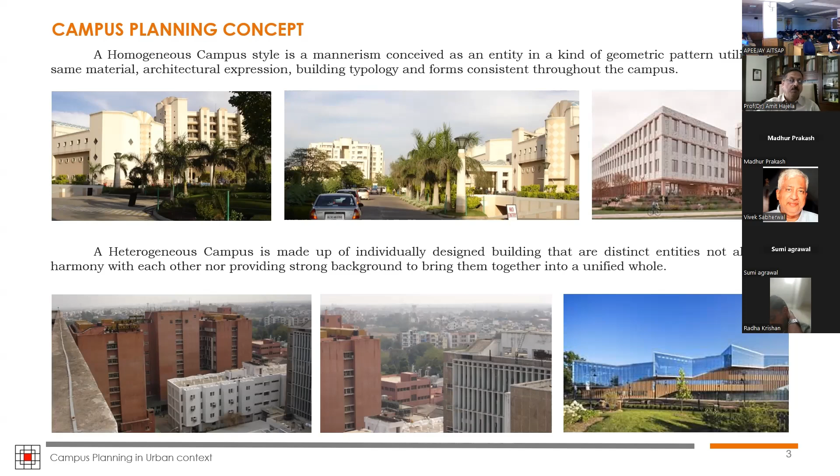They are not always in harmony with each other, but they still come together by virtue of various other aspects of design. So maybe in many cases, it's the landscape which becomes the stitching factor, or the public space design becomes the stitching factor, and they still become a comprehensive whole. So you get a set of buildings which have got their own unique identities, but then they still come together to provide their desired outcomes in terms of development.

Now, if you look at the critical models for development of campuses, we basically have the concentric pattern, the zonal pattern, the molecular pattern, which are fundamentally being used as the basic structuring principles for the campuses. Now, we have a theory which is called the core and periphery theory.

And that core and periphery theory is quite evident in the concentric pattern, where the academic buildings form the core of the campus, and they are then spread out through a series of rings where different levels of facilities are being dispersed, which primarily in a university or institution building has the academic areas. It has got the amenities areas. Amenities would mean all student-oriented activities.

It may also have a very dedicated research block, which could be made evident, and it is plugged into the main academic core. Then we have the residential facilities for residential campuses, but they are all being layered, and there are transitions which are being designed from the core to the periphery of the building. Now,

I'm going back to the principles of the Delhi Master Plan, which talks about the distribution of land in the university campus, which is fundamentally distributed into four broad categories. As per the Delhi Master Plan 2021, and which also has been suggested to be modified for this Master Plan 2041, where we are looking at higher FARs being provided to the academic building.

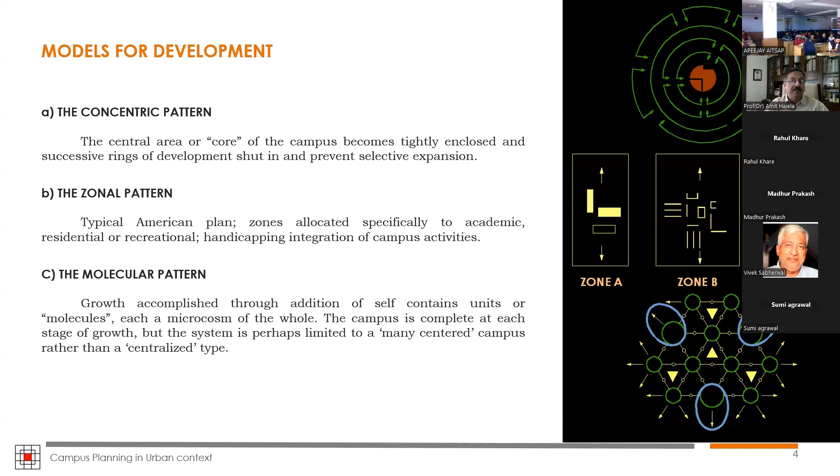The third category is the molecular pattern. In this case, the whole development is done in a molecular fashion. That means every small development is an entity in itself. However, when it keeps on expanding, they become an integrated campus as a whole, and every molecule at each stage is fully developed, so that it can perform and it's operational. And it also translates into distributed molecular components, which have to be integrated as a centralized campus by virtue of the public space design that could be undertaken for them.

Then the last pattern which is being utilized is a linear pattern. In the linear pattern of development, the buildings are set along a linear spine, and every component of the campus, which is again part of the same use-based pattern which we found earlier, gets integrated and continues to make a central space. Then the campus expands either linearly on the x-axis or the y-axis, and has its own set of expansion along the central spine, and also continues to expand vertically on either side of the central spine. So that also becomes very integral, and the campus continues to grow outwardly.

This also has an advantage where you can build the campus where the central core gets developed in the first phase, and the subsequent expansion can be taken horizontally on either side of the central spine, and it can grow incrementally. Now, something which is important for you to recognize is that campuses are never constructed in one shot.

It takes several decades to complete a campus in its entirety. And therefore, there is a component of incrementality which is associated with campuses, and they need to be characterized, structured, and developed in a fashion in terms of the spatial characteristics, the integration of technology, the laying out of the infrastructure, and the mobility plan for the campus. So all these have to be planned right from the inception, so that incrementality is embedded into the entire process of the development of the campus.

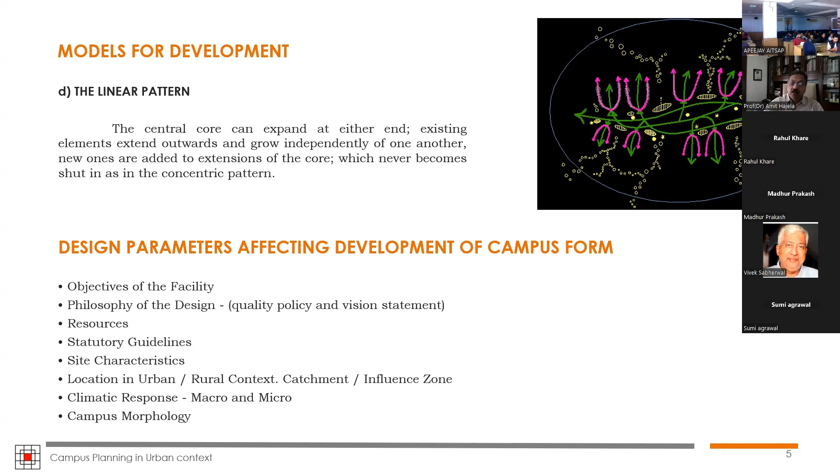Now, when we talk about the attributes of responsive campus design, it primarily gets distributed into 4-5 very critical areas. Use, which is the building typology; imageability that it offers in terms of visual aesthetics, activity structure, and it might have a very strong heritage connect, which would be very important. The efficiency in terms of circulation networks, the spatial efficiency, the accessibility, the flexibility, which allows us expansion.

And when we are doing any kind of add-on to the campus, it should be embedded in the principles of conservation and preservation, where you are trying to use the heritage buildings as very significant markers, which have great association with the city and the people and the community of the campus who connect themselves with those buildings.

And that's true for most universities, as I was talking about in Europe, in US, and in the South Asian countries, where they all have some very significant buildings. I don't know if you've seen, we have one of the oldest engineering colleges in India, which was the Thomason Engineering College, now IIT Roorkee. And it's characterized by the main building and the architecture of the main building and the space that actually qualifies that building as a very majestic building, designed in Doric style of architecture.

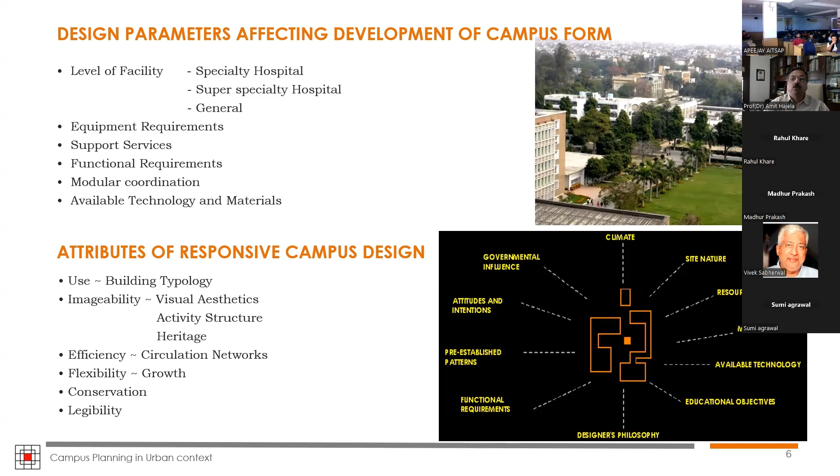And they are the most significant spaces within a campus where most associations get developed. And most associations are also contributing to interactions that happen along the campus, and they become an essential part of our large collective memory of the campus, which we live with. And therefore, we always say that student life is one of the finest eras within the lifespan of an individual, where you cherish the best part of your life in your university or your educational campus, and that stays with you for your lifetime.

And it is those spaces within the campus where you have spent your time, where you have interacted with your friends, the way that space was being utilized, and the quality of that space, the way it was being articulated, becomes so very important in establishing that collective memory that is so important.

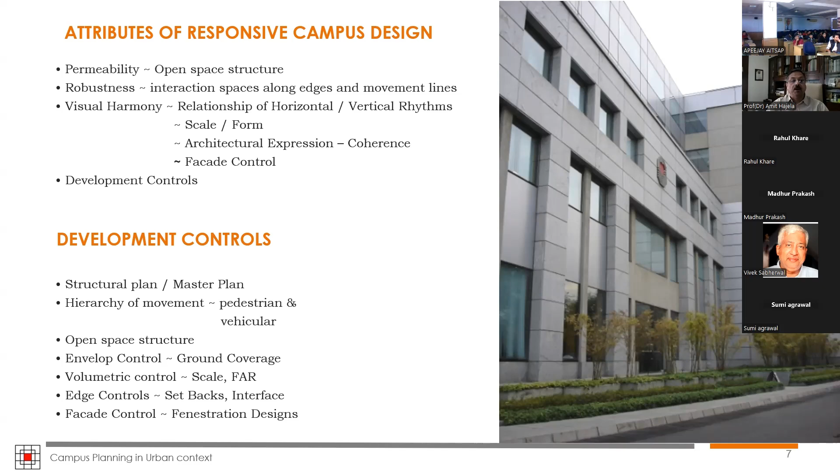And the last part is how the facade of the buildings are being controlled, which probably becomes a specific aspect of continuity or coherence, where the building elements are so articulated that they continue to find a reference or they become a vocabulary which controls the facade, and maybe it connects the building types, and it becomes like a homogeneous outcome of the buildings.

Now, the other aspect which is very significant for the development of the campus is the safety of buildings. Now, this could be in terms of the seismic safety, could be from all disaster risk reduction methods, DRRs, which are very, very important. And I think in today's times, when we talk about it, most of it should be governed by the natural processes which are there.

So nature-based solutions today are some of the best solutions that should be deployed, which are being developed as a consequence of the understanding of the site, reading of the program, reading of the context, establishing and mapping of what is around you, and developing a vocabulary which suits the development as a whole. And that's how the concept actually gets developed and derived. No concept can actually be derived in absence of this larger understanding of the contextual reference and the various aspects and dimensions that we just mentioned earlier.

So accessibility, as I said, is important. Safety in terms of fire safety, electrical safety, environmental management, they're all critical to providing safety to the user. And primarily, let me tell you, most campuses are very user-intensive buildings. And that's where the principles of critical thinking, lateral thinking, and design thinking all come together. And the idea is to be designing the campus for the user.

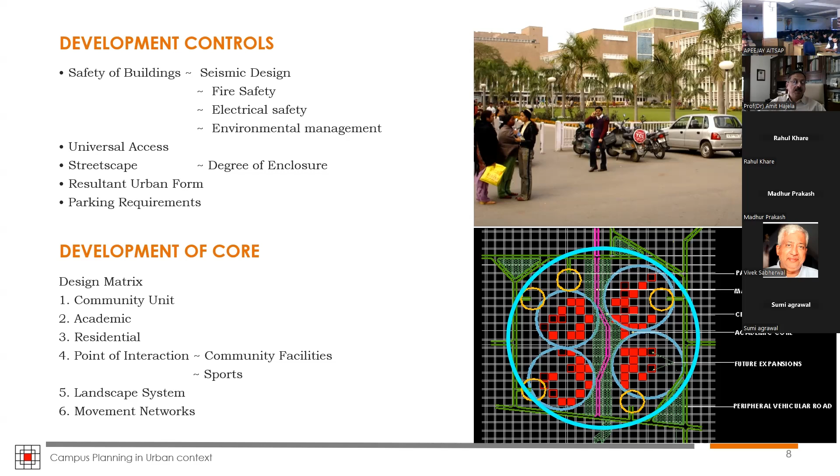So therefore, the critical design matrix translates into a community unit, in terms of both the student and the faculty, because that's what actually makes the academic community, the academic areas, residential areas, the interactive areas, which include community facilities, sports facilities, recreational facilities, the system of landscape, the movement networks, the network of the infrastructure, and so on and so forth. Now, the guiding principles for both greenfield and brownfield projects could be summarized as a whole in these very critical 21 significant aspects of campus design.

So a campus has to have a vision and mission. Campus has to be sensitive to site and environment. The campus needs to respect the natural landscape and the biodiversity. The campus should have a response to the context and historicity of the area where it is being developed. The campus should have a very strong interface with its adjoining neighborhood or with the adjoining areas.

The linkages of the campuses are important by virtue of its connectivity, both internal and external, and also to the public transport system that we're talking. The zoning of functions within the campus, again, is very critical, and that translates into structuring and the structure plan. The campus mobility within itself. That means while we are connecting it to the external mobility, or urban mobility, we are also connecting it to the internal mobility by virtue of very clearly defining the vehicular and non-vehicular areas.

The campuses need to be designed for inclusion. Inclusivity is the way forward in the 21st century. And I think all buildings, campuses, cities that we design have to be inclusive in very nature. And it should meet the kind of diverse cultural and social responses that we have in the context where they are built. And it is an equity that is being established and it is being manifested through the design of the built environment.

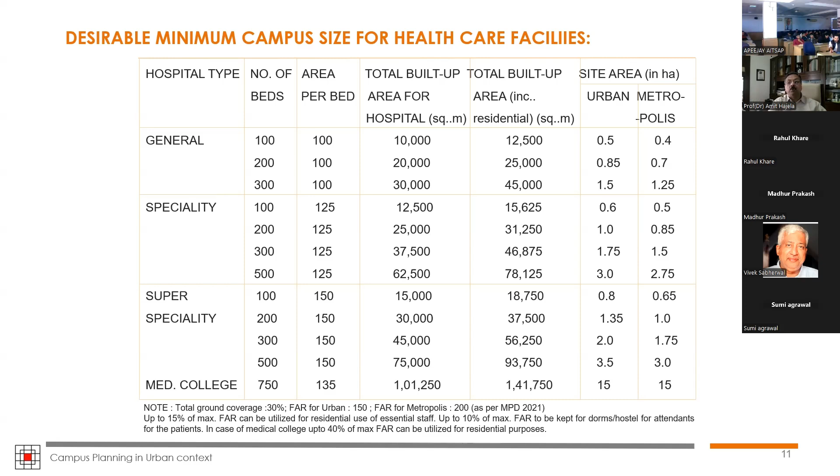So we wrapped the new hospital building around the main building, and it became a very important aspect of its integration, and was then interspersed by various functions in terms of housing, some training centers, nurses' hostels, staff hostels for the staff, because it was not an educational institution, it was a hospital. So we basically had a hostel for nurses and residential areas for the doctors, distributed through a series of green spaces, which could be used by different users at different points in time.

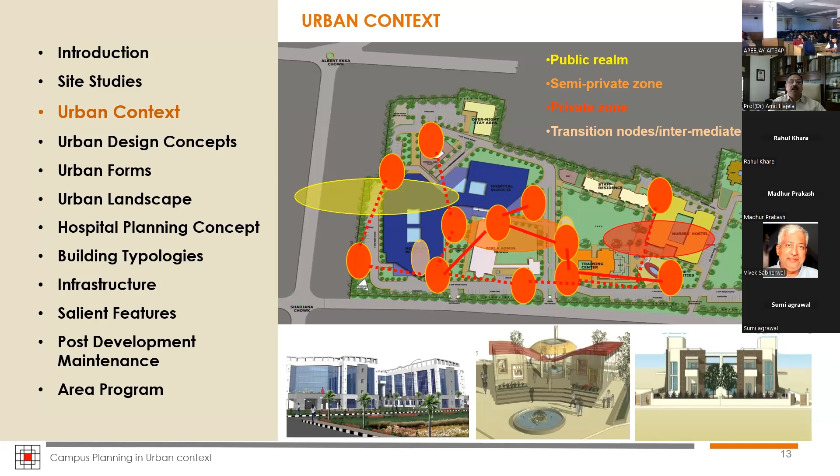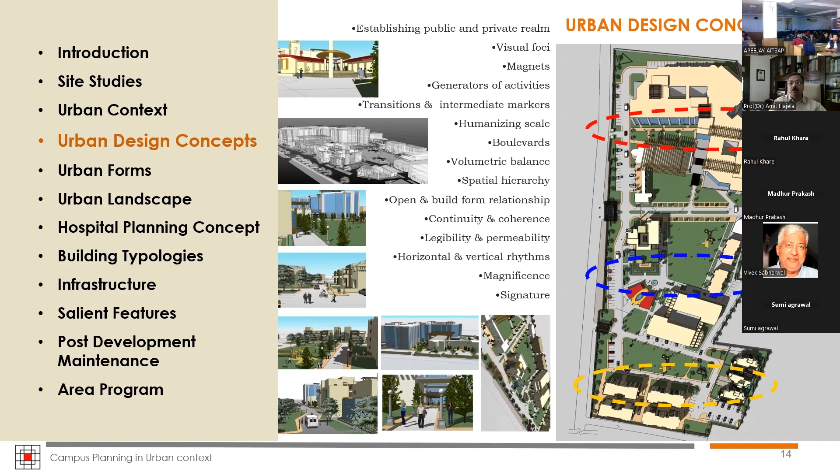The spatial hierarchy was again articulated with respect to use, open and built form relationship, continuity and coherence, legibility and permeability, horizontal and vertical rhythms, the magnificence of the entire building and structure, and finally making it a signature building in the entire urban context. So we had this series of hierarchy of movements, and that's how it was articulated as we went along. So the different kinds of urban forms got created.

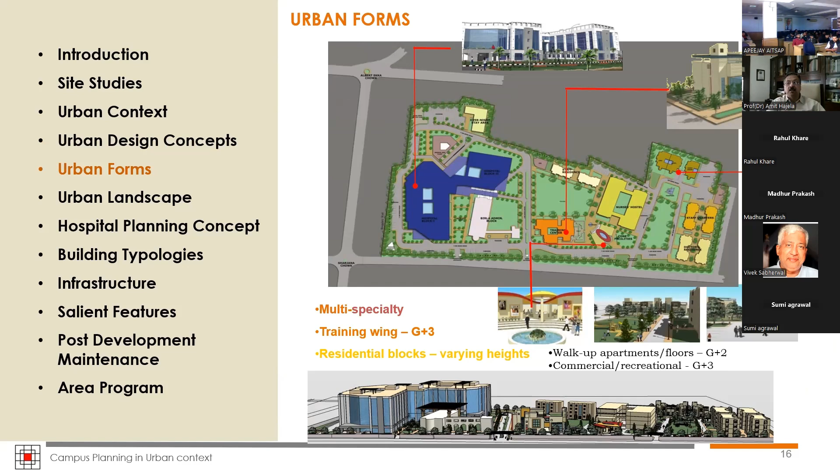You see the site section and how the volumetric control was developed. The very function demanded a high-rise building at one end, and then slowly it was managed down to the scale of the residential buildings. It had a series of unit-level open spaces, cluster green spaces, large urban green spaces, and public green spaces as part of the open space hierarchy.

Now, by and large, we look at hospital planning as a concept. I'll just briefly touch upon the hospital planning concepts, which are actually developed as a collective effort of the architects as part of the design team, doctors, the hospital administrators, the paramedical staff, the service providers, the engineering teams.

So they're all important in the way hospital planning is being undertaken. So ideally, one needs to take a very important integrated approach to the design of hospitals. Infection control is the biggest problem that we face in these hospitals these days, which is as a consequence of the hospital-acquired infections, and it's a global problem that is being addressed.

And from that point of view, patient safety therefore becomes very important, both from the active side and the latent side. Environmental control, sick building syndrome, which is important, and control of bacteria and bacterial infections being expanded. Reduction of the indoor air pollutants, the aesthetics and the interior environment, socio-cultural aspects where the building or hospital is being built, biomedical waste management, and then something which is a fundamental where we talk about diagnosis before treatment.

That means you will treat a patient once you have actually diagnosed the real problem. So you have to have a very strong diagnostic facility which is available, and from there that decides the progression of the treatment. Emergency and trauma are again a very important aspect, because most patients do roll into emergency conditions, or maybe it could be a trauma-based condition for various reasons, such as a medical emergency or an accidental emergency, and they need to be provided with medical aid and facility.

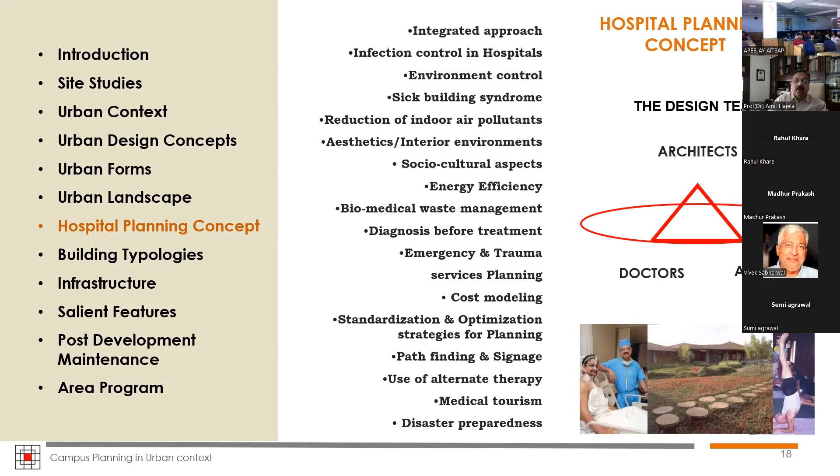So primarily, there are 5 important areas in a hospital, which include the outpatient department, which is the OPD, the inpatient department, which is IPD, emergency and trauma services, the diagnostic areas, and the services, hospital services at large.

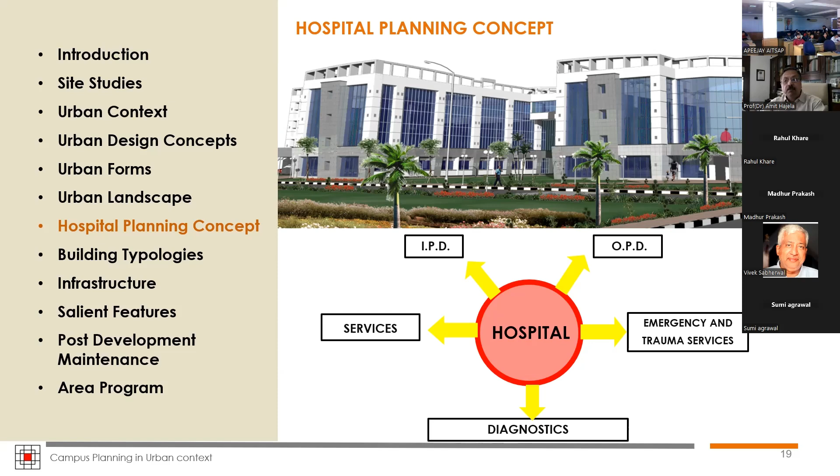Now, the important aspect of the operational and functional planning of the hospital includes its use and efficiency. The equipment planning is the most important, and systems design, because it's the equipment that decides the spatial planning. That's why I said the level of facility will be the determinant of the level of equipment that is going to be housed, and therefore it has to be designed for that purpose. Then we have the patient psychology and the healing environment which needs to be provided.

We also need to respect the privacy of the patient, the interior environment, and the circulation, both at the building level and at the external level, and the kind of flexibility of expansion that the hospital provides. So I think it becomes a very important aspect, and hospitals these days are very important imageable components in the larger urban landscape. And therefore, we need to be very cognizant of the fact that the imageability of the hospital, being a very important segment in the entire urban landscape, needs to be looked into.

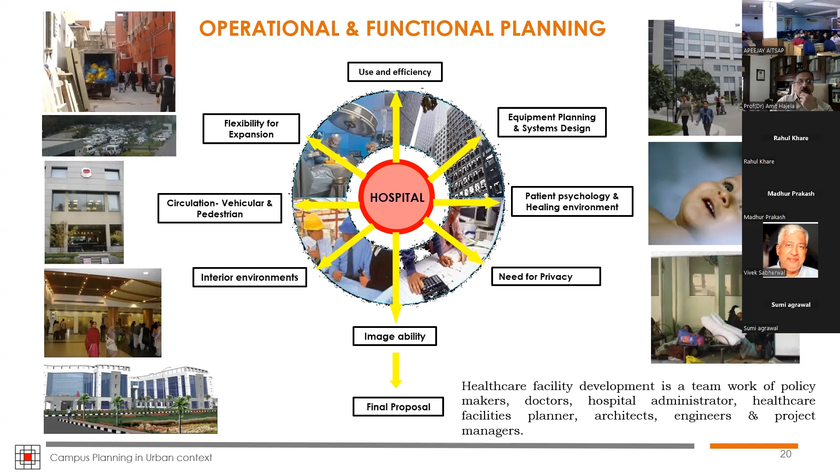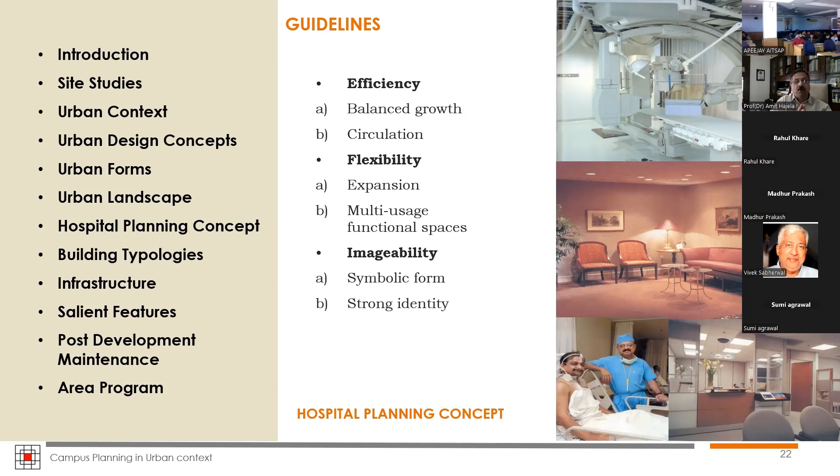And all these dimensions, when put together, should lead to the final proposal of the hospital. So a critical design matrix needs to be developed, which should be an integration of all the above that I have talked about. And the critical guidelines should be broadly distributed into 3 areas of efficiency, flexibility, and imageability. Efficiency should include balanced growth and circulation. Flexibility should include expansion and multi-use functional spaces. Imageability should be translated into symbolic form and a strong identity in a healthcare facility.

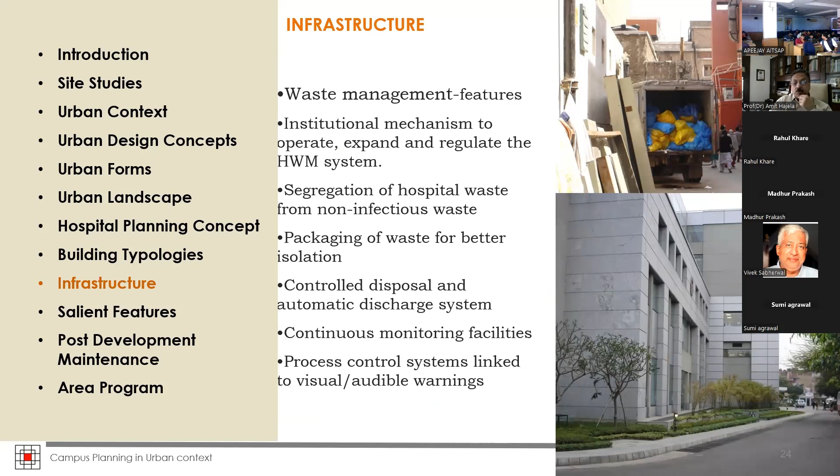Now, the infrastructure issues should include the aspects of waste management, the institutional mechanism for the entire hospital waste management, segregation of waste, isolation, disposal, monitoring of facility, process control, and systems linked to both visual and audible warning for differently abled patients, accessibility and so on, sewage treatment, water supply, electrical systems, internet connectivity, satellite communications.

Now, we are also talking about things which are connected to telemedicine. So therefore, it becomes important. Communication networks, power backups, core facilities, centralized pipeline system, and rainwater harvesting systems.

Apart from that, we need to be looking at a sustainable campus from the perspective of alternative energy sources, energy efficient design, thermal comfort conditions, noise and air pollution control, water management, waste management, soil stabilization, sustainable sites, reuse of recyclable materials, and disaster risk reduction that I have been talking about. And this applies to practically all types of campuses that you are dealing with.

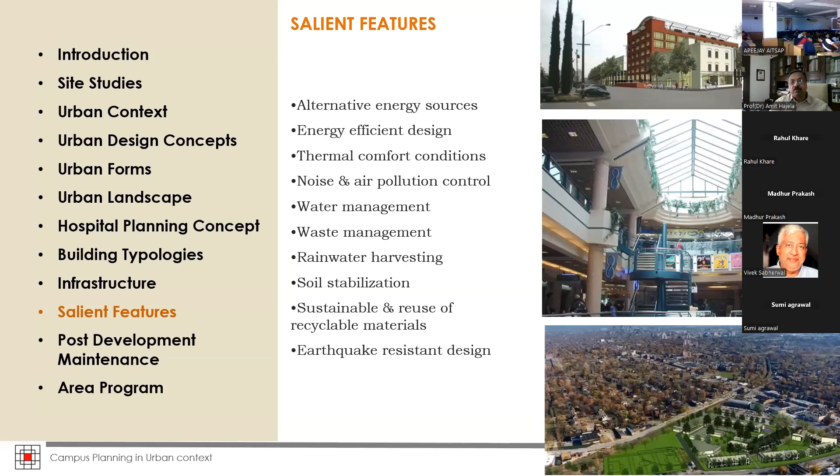So I think we need to be talking of all the energy efficiency measures, water conservation measures, measures which enhance the use of alternative energy sources, and they can very well be manifested through the design of the built environment.

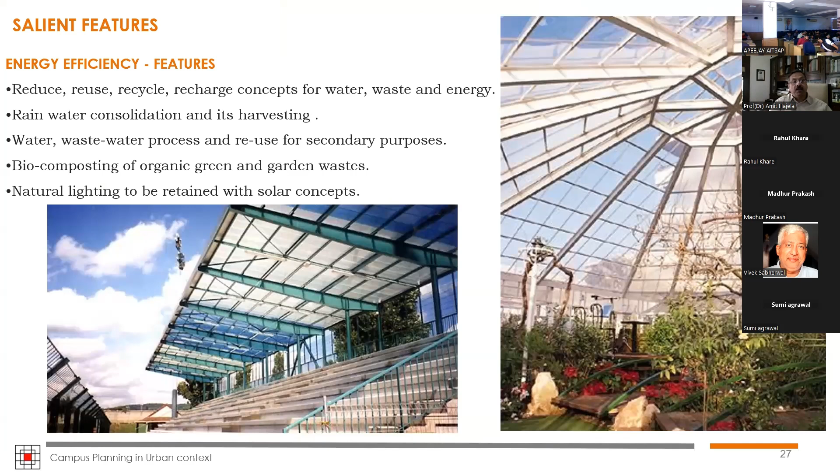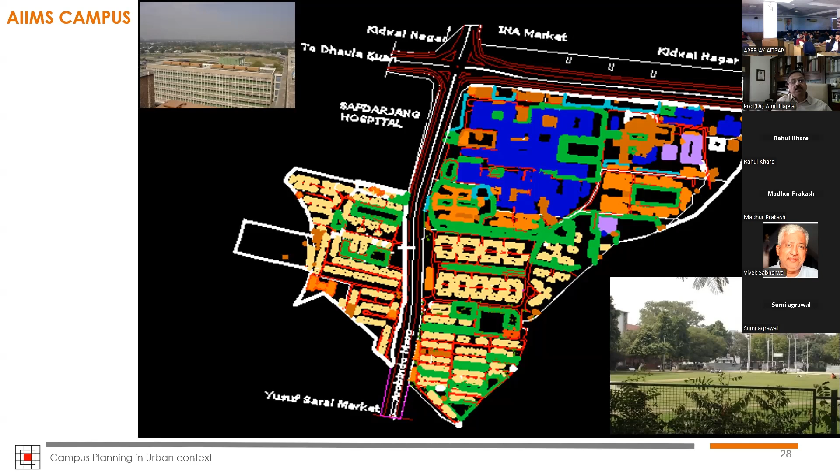Now, this is an example of the AIIMS campus and the way it is congested, and now it's going into redevelopment. So the blue area that you see, primarily the upper part of the campus, are the main hospital buildings, and on the rear part of the campus are the residential areas. They have expanded the residential areas across the road, behind the Safdarjung Hospital, and that residential area includes the staff housing primarily on that side.

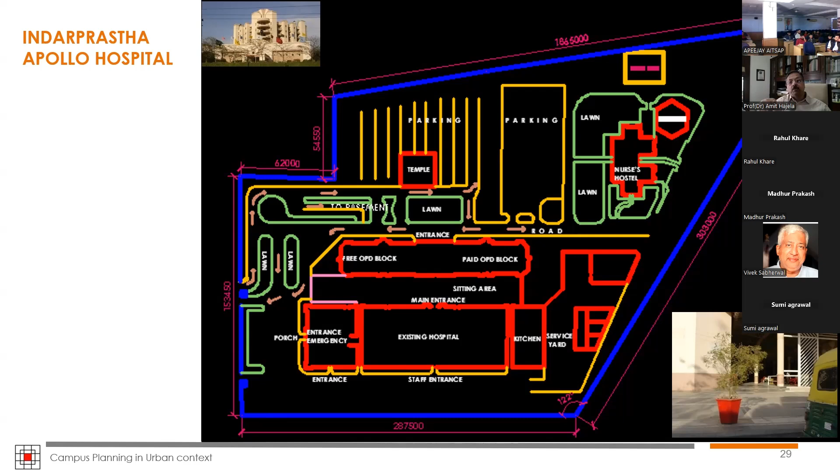Then we see the example of a homogeneous campus, which is purely a hospital facility, the Indraprastha Apollo Hospital. It has basically two prime blocks, the OPD block and the IPD block. And we have the emergency with the OPD block on one side, and on the other side the IPD block supported by hospital services and a nurses hostel alongside the main campus.

Now, this is another interesting example, the Escorts Heart Institute and Research Centre, which is now Fortis. They expanded their hospital and got a very special approval from the local authority, where they had buildings across the road and they were allowed to create an underpass between the two buildings. So they integrated the old building, which is the IPD. They did an expansion, what you see in the images.

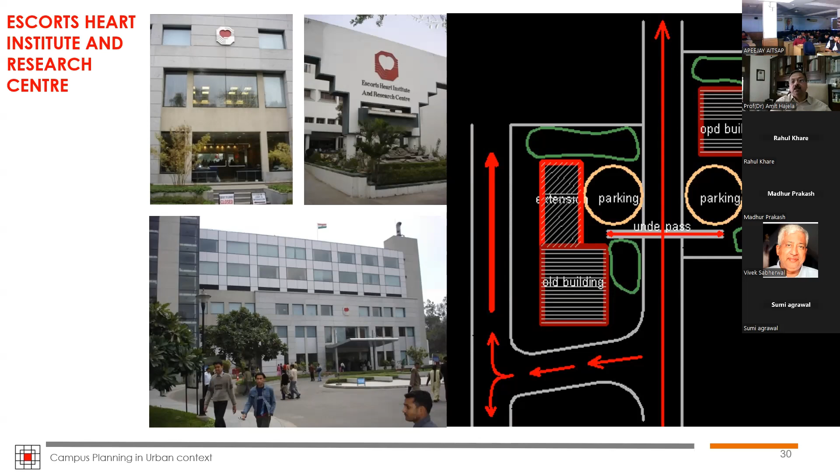So the top left is the old building and the top and the bottom ones are the expansion of the IPD areas. And then they connected the OPD on the other side along with some residential facilities. An underpass was provided to connect the two building blocks, and the hospital becomes one single entity. It's a very private use underpass which has been provided.

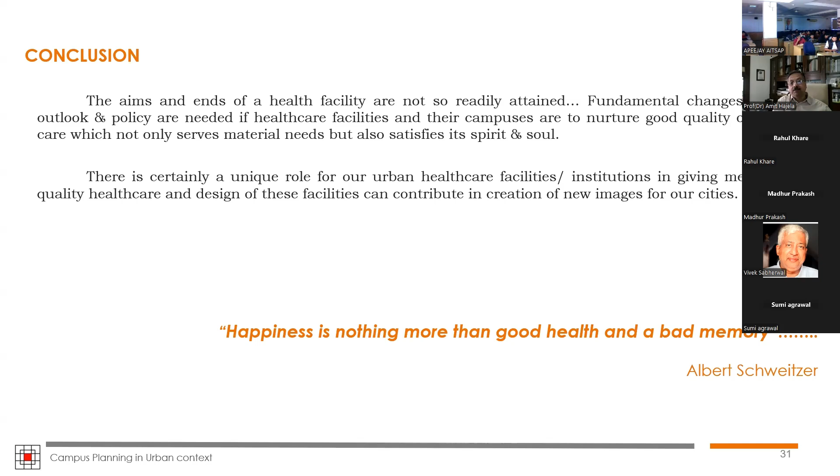So primarily, if we conclude, I think it's very important that we create happiness for the user. Going to the hospital is never a very healthy requirement, but in case we can't avoid it, it should only translate into giving you good health and should just remain with you as a bad memory for a time which passed away.

Now I'm coming to an educational campus which we worked on, and it was part of a very strong urban campus. We designed this campus, which also included a medical college in the city, and this is the Allahabad University campus, where we were commissioned in 2006 and we worked on this campus for almost about 12 years. This total campus has grown over three different periods, starting from 1887, which is the first campus that you see, the Muir College campus.

And it is a truly urban campus. There are a total of 10 campuses interspersed in the city. And this that you see is also along two major highways. One is the GT Road, which comes from Delhi and Kanpur and goes right to Varanasi and further up to Calcutta. And the other one is the Lucknow Highway, on the other side. So the campus is actually abutting two major highways.

The total land area being developed in these three campuses was about 356 acres. And we added another 72 acres of medical college, again in the city. So what you see here are buildings: the blue ones are the existing buildings, the ones in pink are being added. Again, you see light yellow buildings, which are the existing hostels, and then the dark yellow ones, which are the newer hostel buildings and facilities.

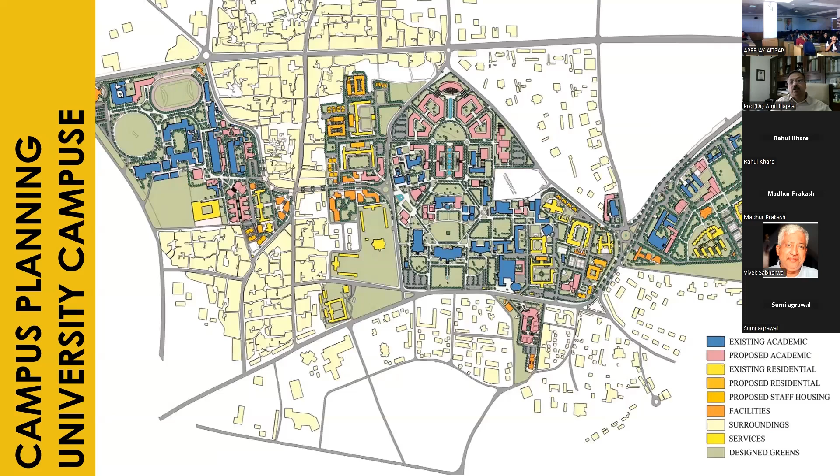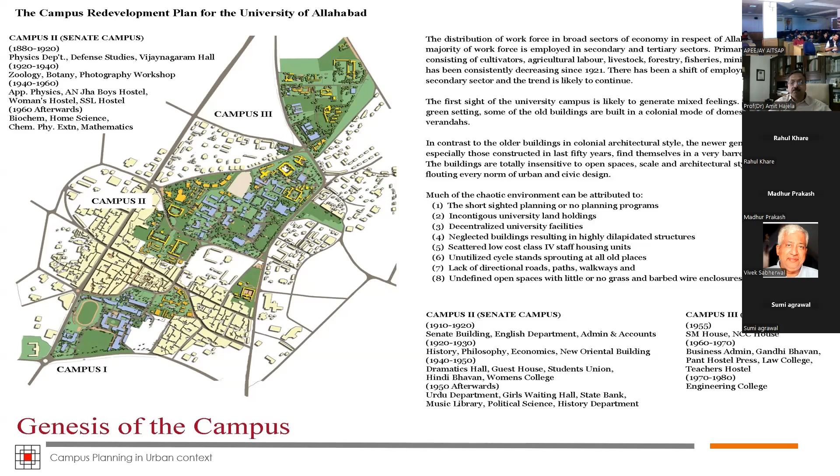Now, these are the different phases as I was talking. So there were first, second, and the third major campuses, and there were allied areas which are owned by various organizations which provide residential facilities on a community basis. So they are privately owned, but they are also an integral part of the larger campus system.

We went through a very elaborate process for redevelopment, which had a very well-defined process, which included the audit and then subsequently the outcomes of the audit, both in the quantitative and the qualitative way, translated into identification of critical factors, the typologies, as I have already talked about. All those components were an integral part of the process, leading to the key outcomes which translated into the derivatives for the intervention into the campus.

We had significant heritage buildings, so heritage buildings had to be integrated as part of the larger system of design and also used as a visual foci in the structuring of the campus as a whole. And then a campus of this stature, also being a publicly funded university, we had to plan it for a 15-year period. Now, let me tell you something.

Normally, campus plans are done in three categories. There's a short-term master plan for a campus, which is for about 5 years. The mid-range master plan is done for 10 years, and a long-range master plan is done for 15 years. So the two campuses that I will show you that we designed and redeveloped were all done as a long-range master plan, and the period was qualified to be 15 years in both the cases.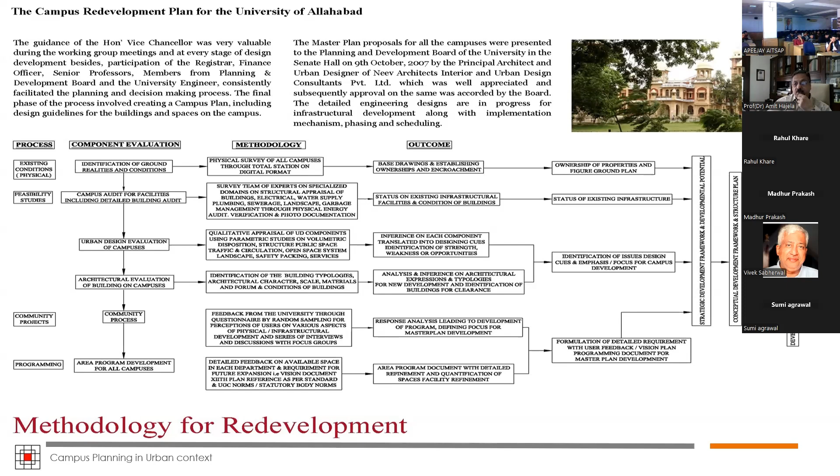Now, this was the basic understanding of the distribution of land parcels, the connectivities, the condition of structures that existed, what are the buildings which were very poor and could be removed and could pave way for new additions to the campus, how the integration between the three could be established by reinforcing the street between the three campuses, and how significant nodes could be modified and developed to become a very significant part of the larger redevelopment of the campus, which would add value not only to the campus, but also to the city at large and to the student community, which comes from all around the region of Allahabad.

And let me tell you, Allahabad University was also known as the Oxford of the East. It was established in 1887; the university established prior to this, in 1882, was the university at Lahore. But then in the north of India, Allahabad became the most significant university after the three universities that were established in 1857, which included the University of Calcutta, University of Madras, and University of Bombay. So in the north, Allahabad University was the most significant university, and it was controlling all other affiliated colleges in the north of India and in the central province, in central India, once it was established in the year 1887.

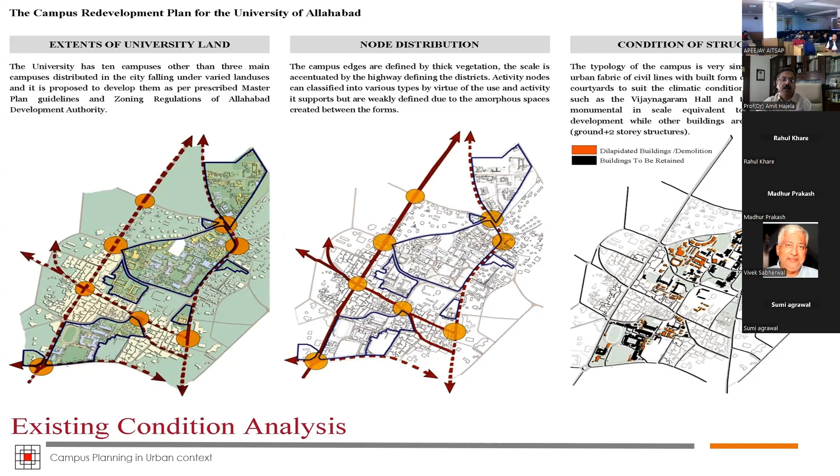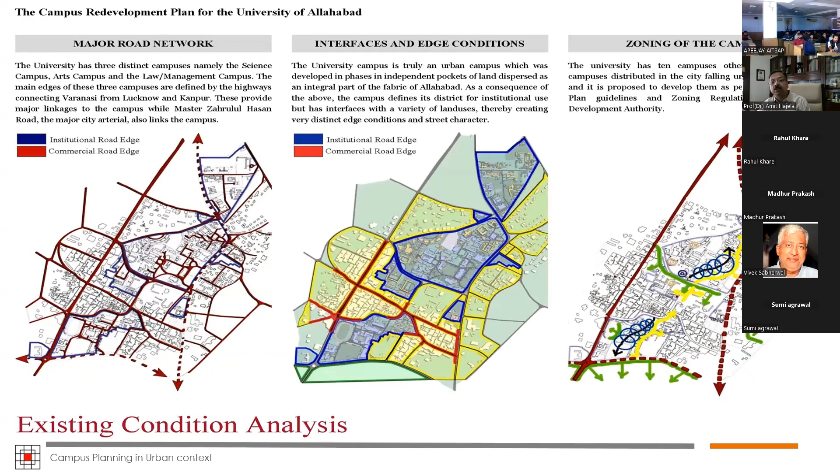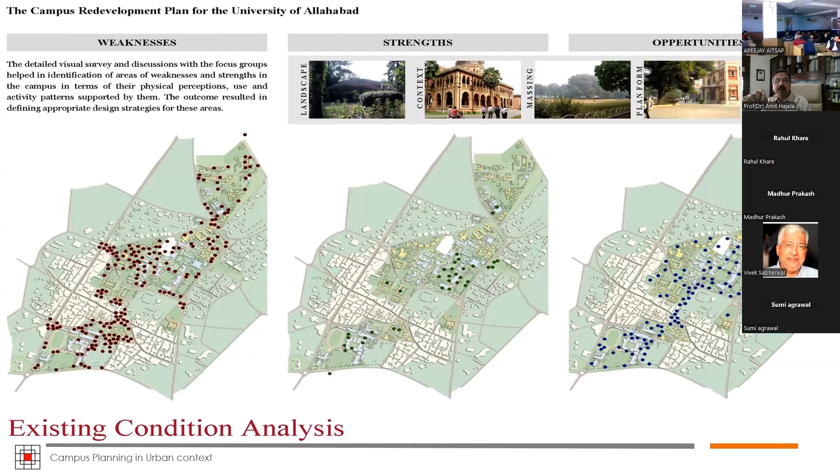So we looked into multiple dimensions and we did the analysis of the existing structure and the way the campus properties existed, what could be the method of articulation, the resources that were available, and the mechanism by which the three campuses could be stitched. So we did a detailed SWOT analysis for the existing campuses at the micro level by doing a very detailed audit of each campus and identified the strengths, weaknesses, and opportunities which we could actually exploit at both macro and micro level for our intervention.

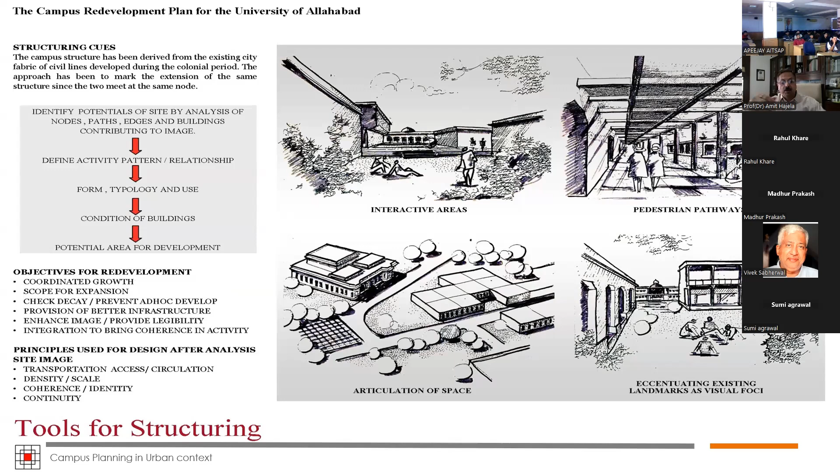So this was the existing figure ground plan, the land use plan, and the volumetric plan of the campus. And then it translated into a series of ideas as to how the integration of campus areas could be undertaken, what tools could be deployed, and we defined the objectives of development and how it could be done. And this is not a homogeneous campus, so different buildings were done in different styles. They also had varied typologies. So we used the heritage buildings as a very significant marker in the entire campus and tried to stitch and develop the entire campus in and around that.

So these were the structuring tools that we used, which we had the movement, associations, clustering of the components of the building types, identity, the patterns of growth, the critical design factors, how to bring about coherence and order, and the typology, imageability, and the legibility of the campus.

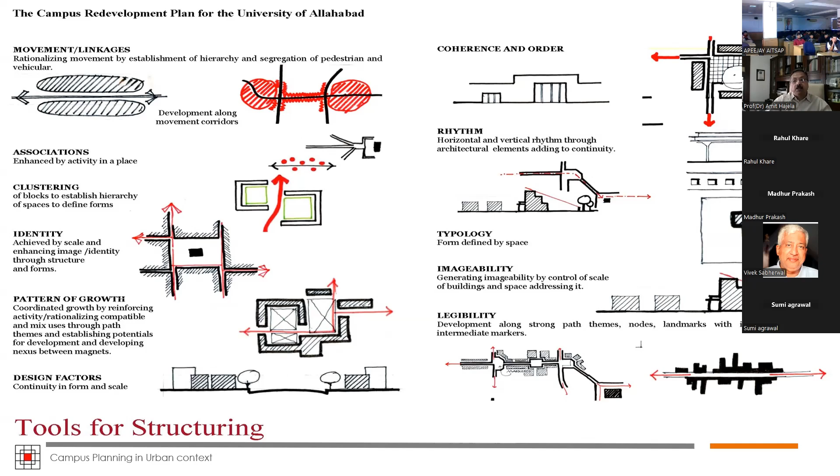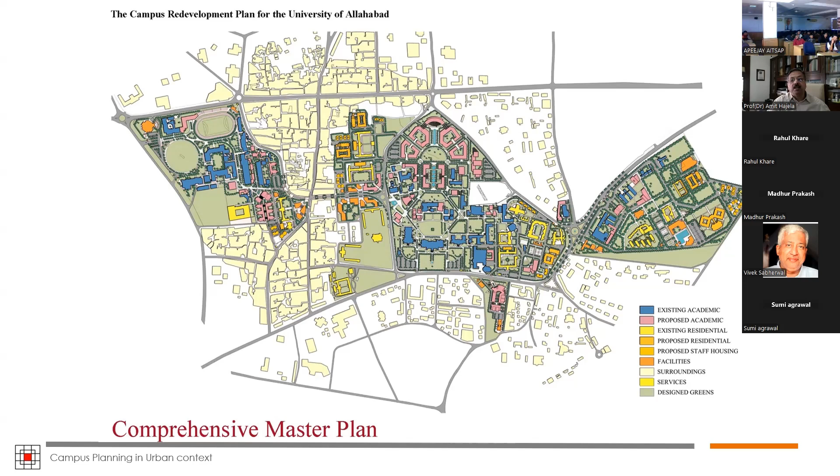And this was the final comprehensive master plan where you see re-articulated systems. The campus was actually pedestrianized by using the external roads of the city as the critical access points, terminating into parking lots and thereafter becoming all pedestrian in the central core of the campus. So this all was being done over a period of 12 years and it was being done incrementally. And several buildings have now come up on the campus, which have been done in part.

So the stakeholder utilization was critical. Demand from the stakeholders was well structured and articulated. And also the funding and the grant mechanism from the Government of India became very critical to this. This led to a series of creation of public spaces, and there were 4 or 5 critical areas which became the great public spaces of the campus.

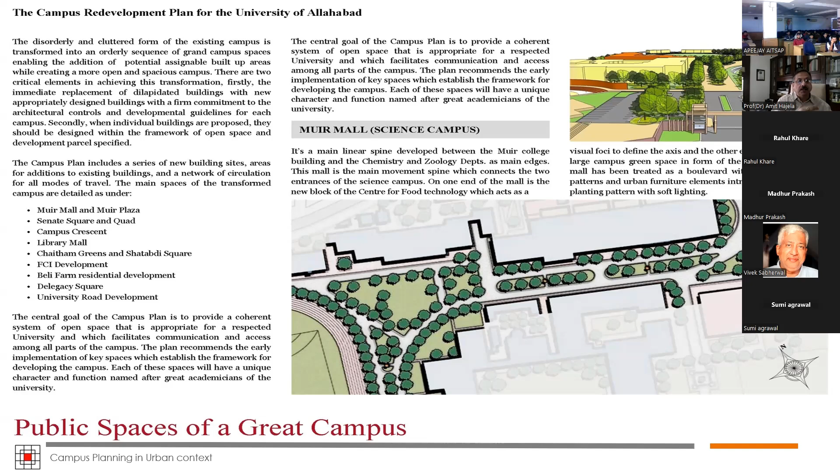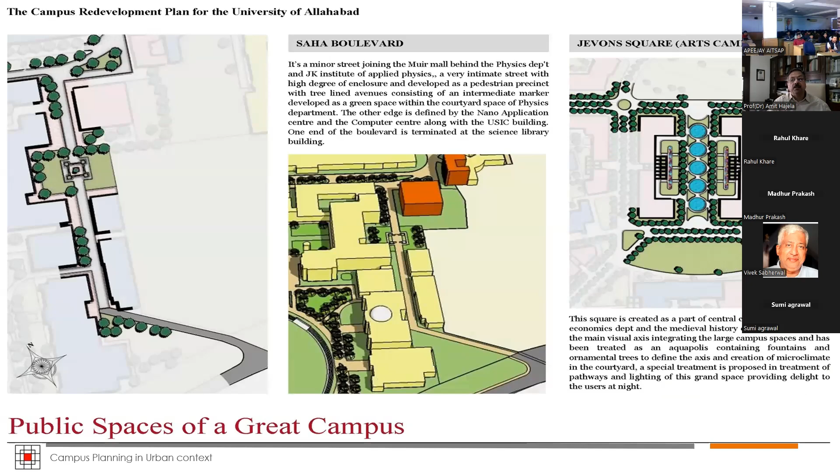And so there were the critical public spaces in terms of the critical malls, the quads, the crescents, the larger squares, and the residential development, and the development of the external areas as interfaces of the campus. So you see all these part areas were picked up and detailed out to become large public spaces in and around the building typologies, and how the structuring was being done to create an experience for the user, where we tried to keep the old heritage buildings as the main axis, and the movement was being articulated alongside that kind of development.

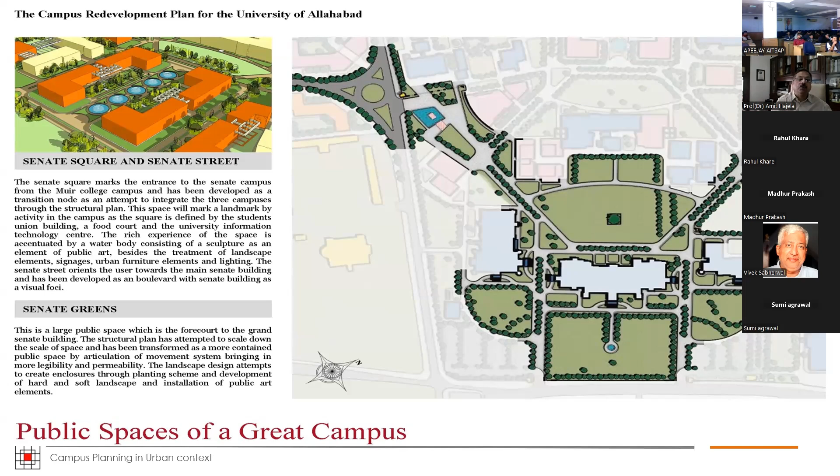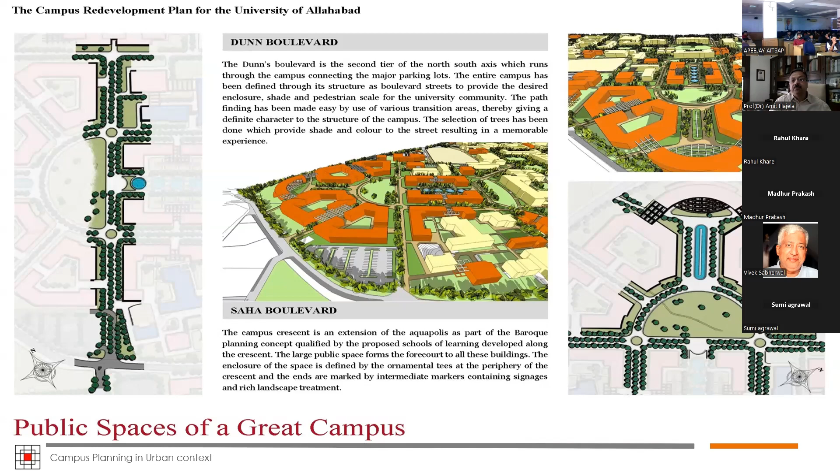So you see all the buildings which are in the orange color are the new additions by the newly articulated systems of movement integrated to parking lots, and therefore becoming a pedestrianized campus. And all these malls that I was talking about, the crescent, the malls, they were all being created by virtue of the articulation of the campus.

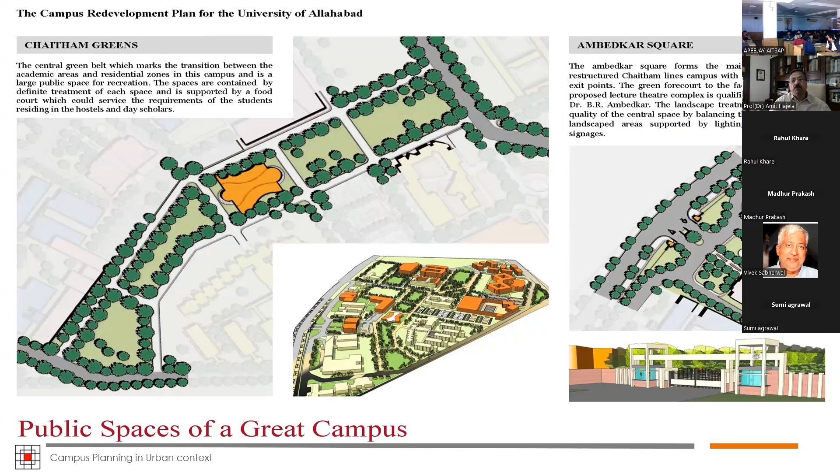Now, these are different ways by which those important experiences were being embedded into the movement system in 3 different campuses. And the large public spaces of the campuses were being derived, with the entrances being qualified, the landscape being handled, and so on and so forth, apart from integrating the recreational areas and reinforcing the sports facilities of the campus at large. So that was the Muir College campus, the first campus.

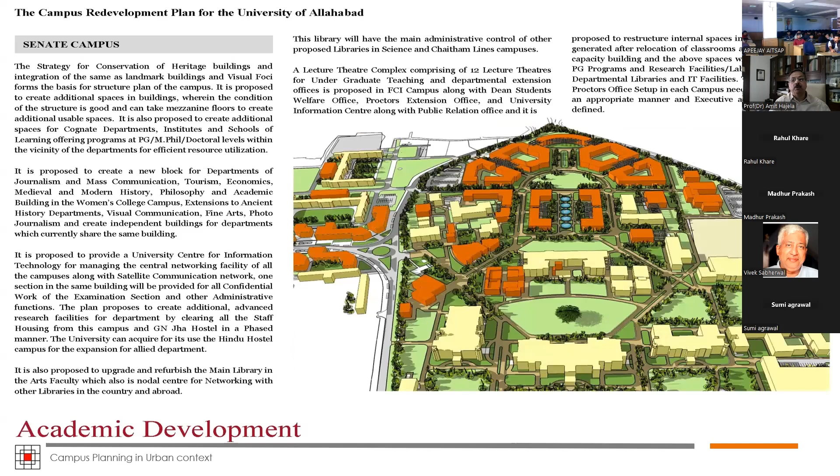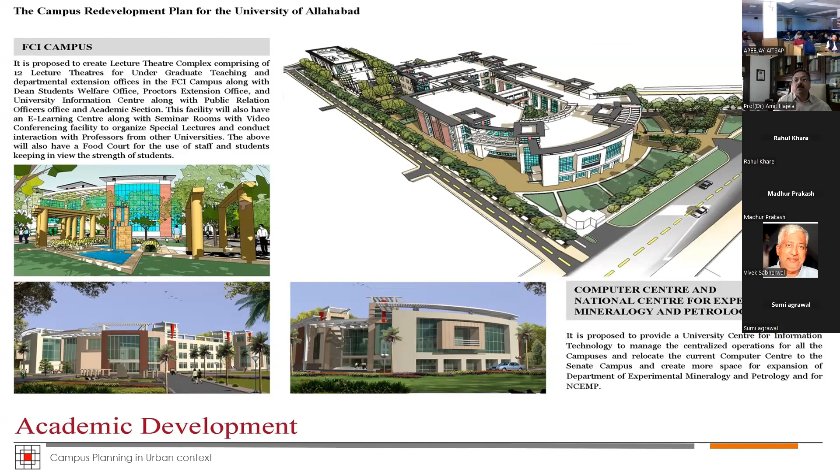This is the second campus, that was the 1920. This is the third campus, which was 1964. And these were the adjunct properties which were being designed as central lecture theatre facilities and the administrative complex for the university. And these buildings have been designed, executed, and they are functional as of now. So if you see in totality, it gives you in a nutshell how 3 campuses came together and how structuring open space systems, movement systems, articulation of typology, and all those things were being integrated.

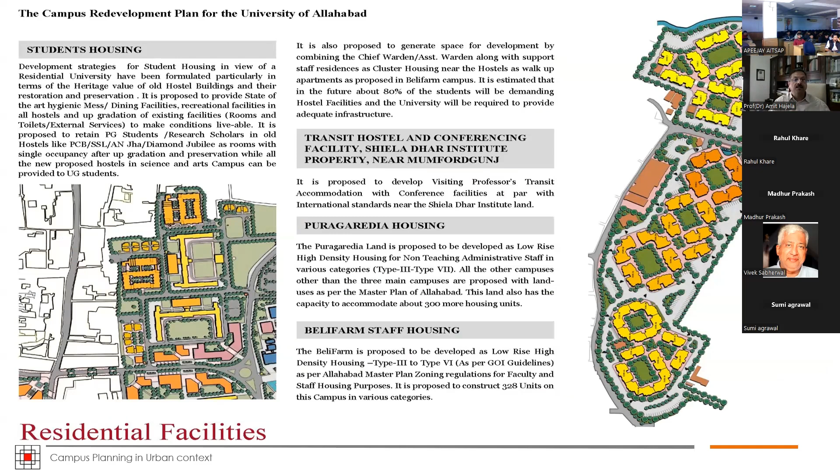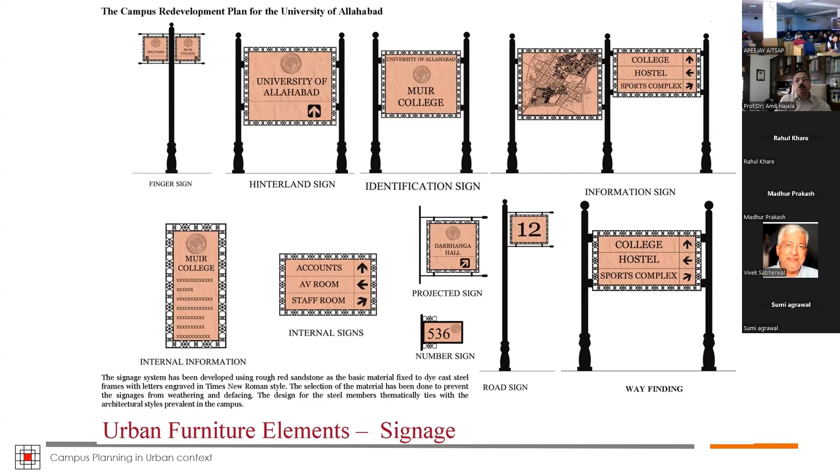Keeping the historic characteristic of the university, we also designed signages which were vandal-proof, and they were specifically done in stone and engraved in stone so that they could be free of vandalization, but it also adds to the historic character of the campus at large.

Now, the next campus that I'll come to is the Jamia Hamdard campus in New Delhi. It's again a long-range master plan, 2015 to 2030. And this also had a very diverse range of buildings, with buildings done by various architects, including Stein, who did the main management block for them.

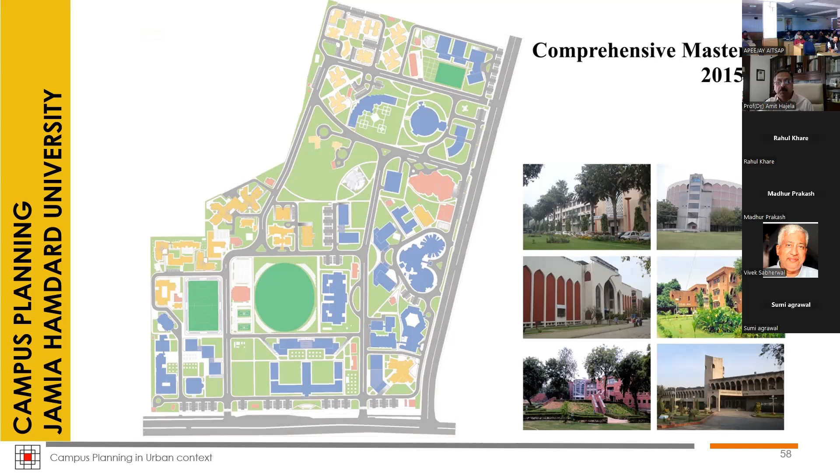And this is how the contextual interface was being established, where we have a Jahanpanah forest, the Tughlaqabad fort on the other side, the Air Force Station, and the lower area is the Sangam Vihar, which is a very large unauthorized settlement, and the other developments of GK3 and development along the Mehrauli-Badarpur road, as you see, becomes the critical part, and also the Tughlaqabad extension on the northern side of the campus.

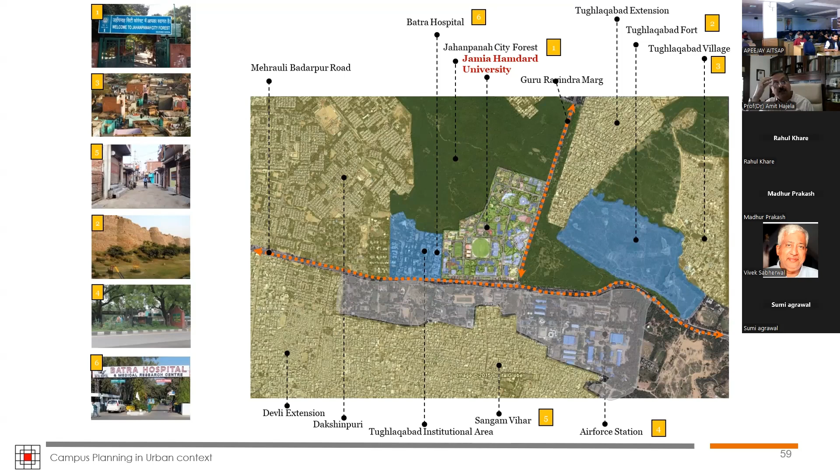So this campus was established in 1962, and thereafter it is a professional university offering all professional degree courses and programs. And they were looking at the redevelopment as a consequence of the new development controls and also the expansion requirements of the university.

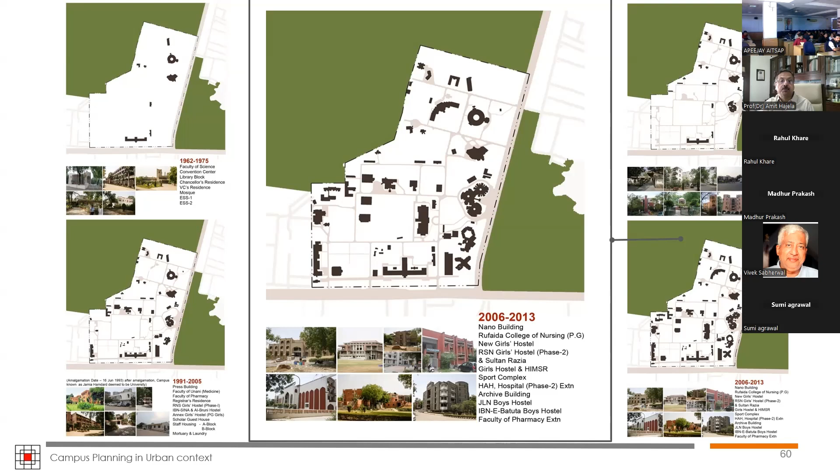And since it started basically as a system of Unani medicine, the whole concept of the campus and the structure plan was put against the four thematic principles of Unani medicine, where there are four aspects which are critical: phlegm, which in Urdu is balgam, blood is dam, yellow bile is safra, and black bile is sauda.

So these are the four core areas, and these were interpreted into four zones of the campus: phlegmatic, sanguine, melancholic, and choleric. And that's how the structuring was done, embedded in the same principle of Unani medicine, and that became the underlying principle of structuring of the campus.

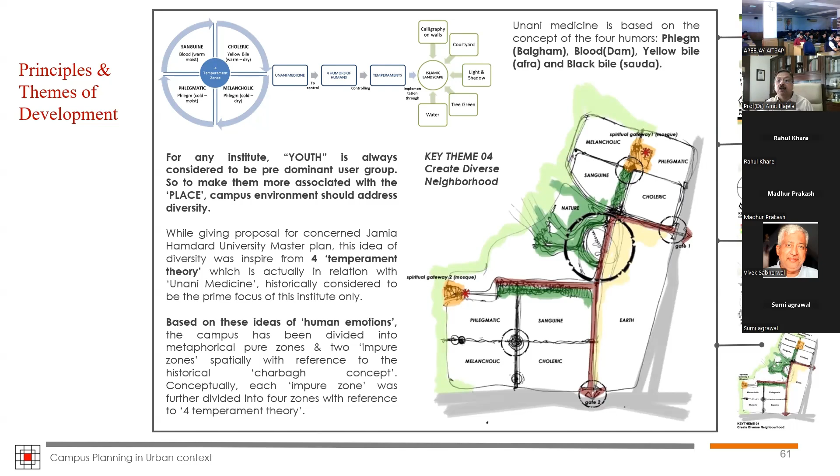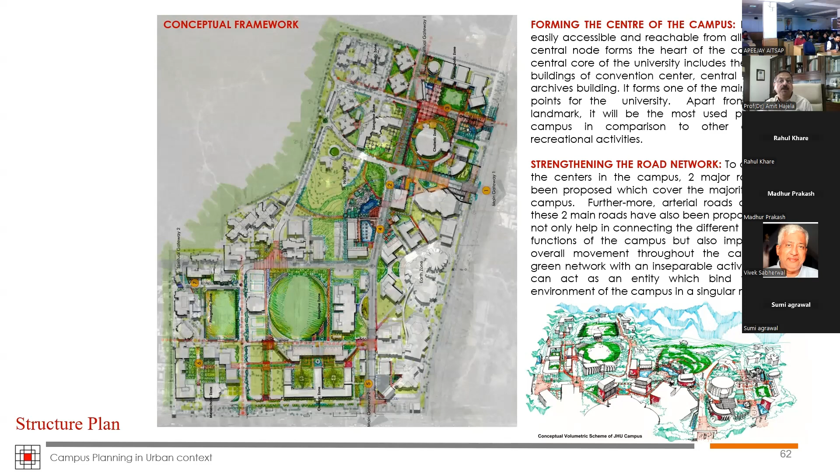So these were the initial sketches that we did in terms of articulation and interpretation of the campus, how additions could be done, and how integration of different components could be structured and worked out. So a structure plan was developed by looking at the movement system in and around the campus, the access points, the designed public spaces, the incidental public spaces.

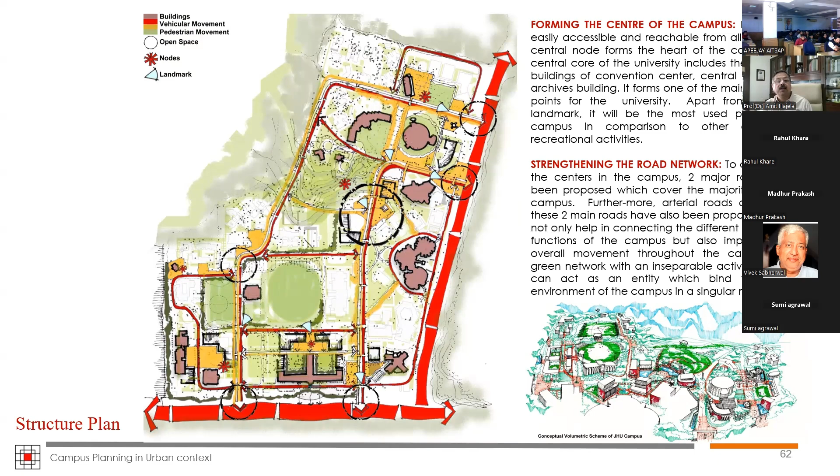And incidentally, by virtue of the landform, there's a 15-meter drop from the north to the south end of the campus. So there was a very drastic drop from the top to the bottom, and that's how it got structured.

Now, these were the critical diagrams that we established in terms of what structures are in good condition, what were the open areas, how the movement patterns work, where the visual aspects of the campus existed, the potential of exploiting the visual areas, how the conservation of the natural landscape could be done by virtue of the terrain and topography, how vistas can be created, and how the components of the campus could be unified as we go along.

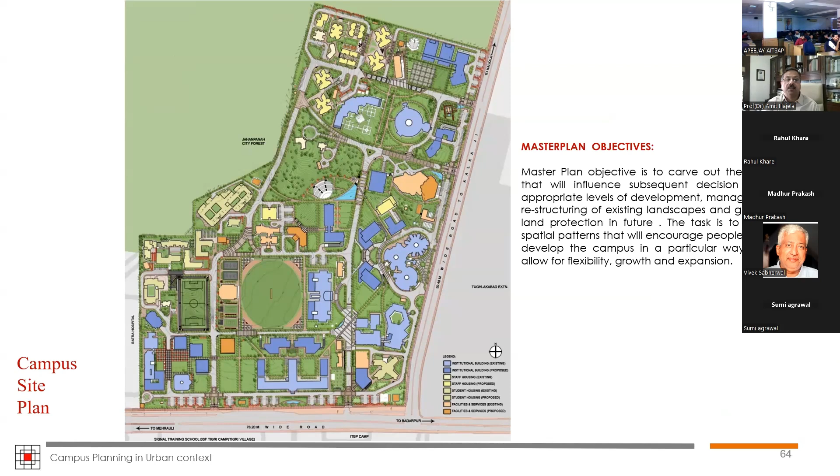So ultimately, this was the final master plan that came about, and the whole area was put through a system of loop roads and integration of the components, reinforcing the research areas, residential areas, recreational areas, as per the existing development control. And the new master plan was done with a lot of emphasis on very important nodes of the campus and the public spaces that were being designed.

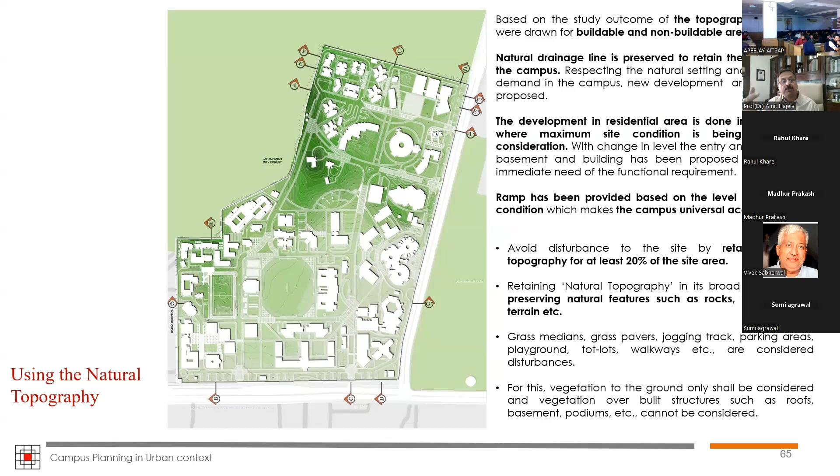So this was the larger open space system that got created, and the topography was the very important overriding component. We also conserved and preserved the natural species of plants, and more plants planted on the site were in the same sequence as the natural vegetation that existed in the forest.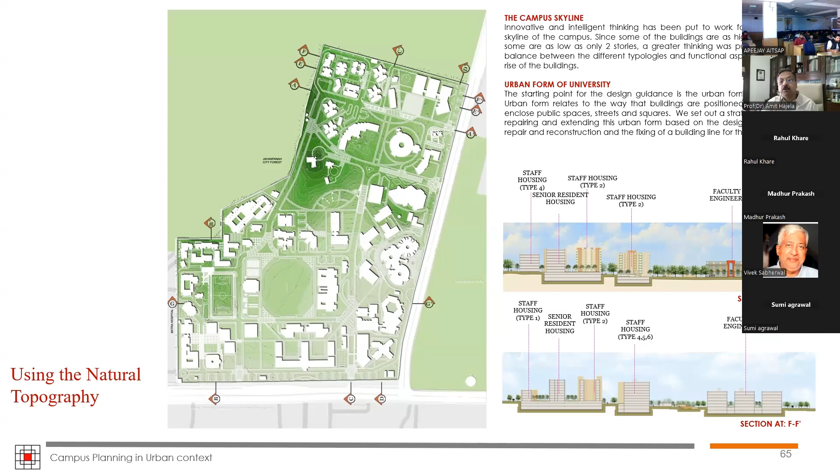Now you see a series of sections which were developed, and the landform and the depression in the landform was used. No area was blasted on the site. The depression on the site was used for parking because the parking load was very high. And there you see the way buildings were articulated, both old and new, the landform was integrated, and the urban form of the campus was derived.

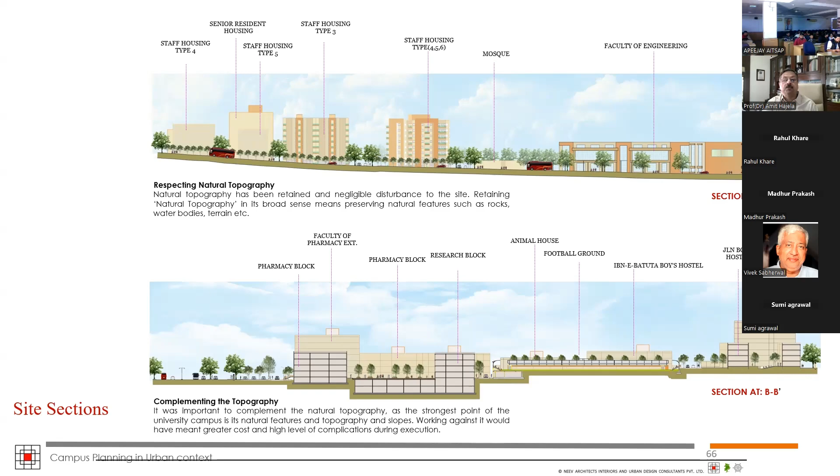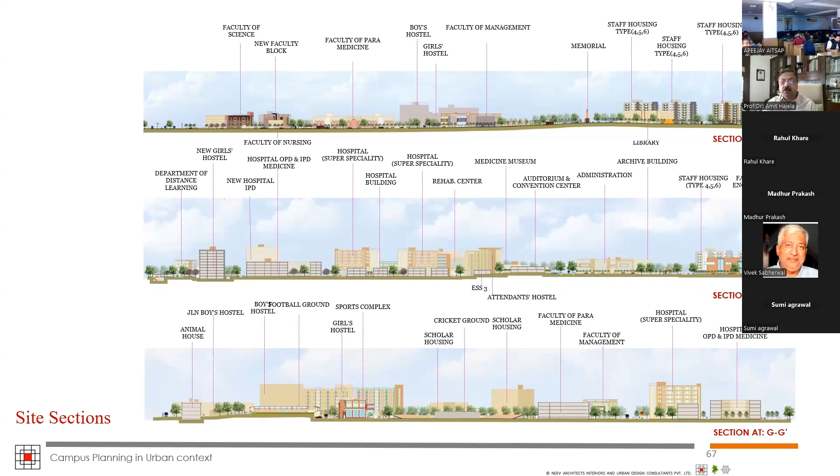Now, these are a series of campus-level sections that were drawn, and it has these academic buildings, facilities, and also the residential buildings. But certainly you see a transition from the low-rise buildings to the high-rise buildings, which were planned for future growth and expansion.

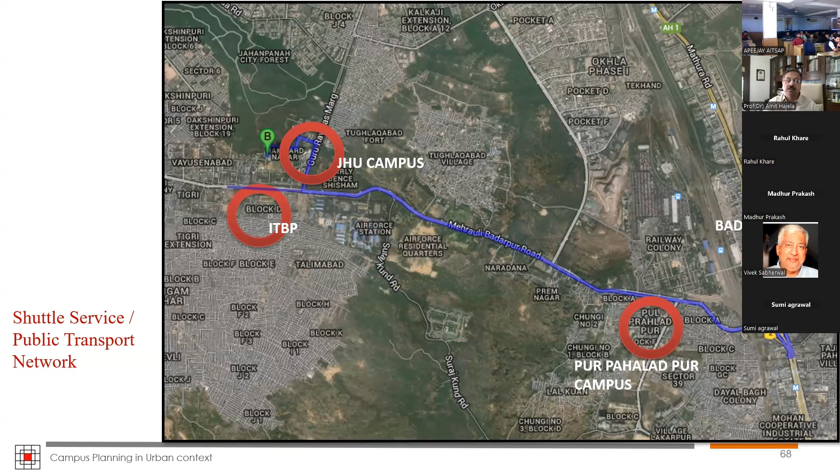We proposed a transport demand management system by connecting it to the Badarpur metro station. And now we have the new metro line, which is going to come on the same axis of the campus. So a complete shuttle service was provided, which could bring students from the Badarpur metro station to the university through the urban transit system and also through our own system of movement. We were trying to strengthen the connectivity from the various nodal points, and the system was derived on that basis.

Now, these are some of the diagrams of some very key public spaces that were being designed in the campus, and they were the important intermediate markers in terms of design, and they were all being articulated individually. So if you see in the entire campus plan, you see a hierarchy of movement and articulation of intermediate transition spaces for the public space design. And they become important markers to create those associations that I was talking about for the students, which becomes a part of their collective memory.

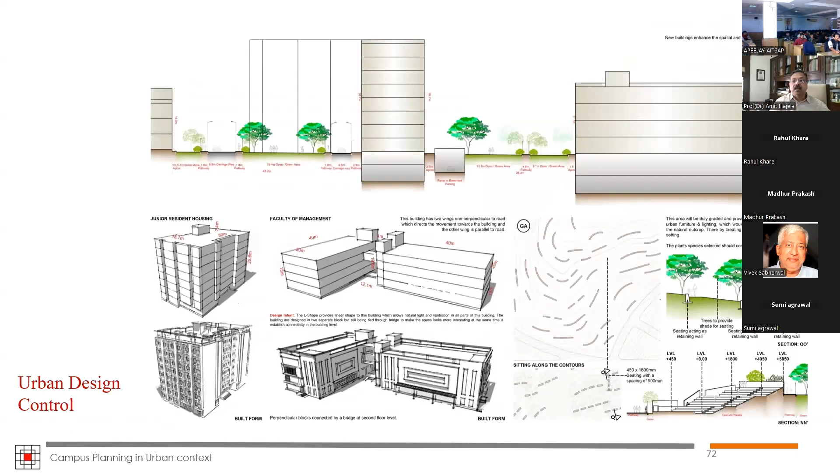So that was the focus of the campus, and the only way we thought we could stitch the campus was through landscape because of the diversity in the architectural characteristics that existed. The only way was to use landform to our advantage and bring about that unity and to bring that stitch in various building forms and spaces together as we go along. Now, this was the whole idea where we designed all these public spaces from ideas to the real drawing that you really saw. And various urban design controls were also being established for the new buildings, for the open space system, and which were also being marked.

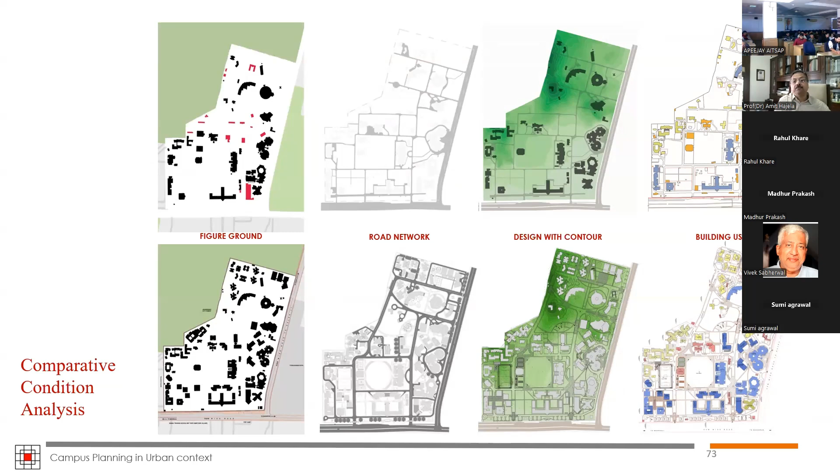So now what you see here is a very interesting comparative condition analysis of what was existing, which is on the top, and what was actually derived in terms of figure ground, movement, open spaces, and uses and dispersal of uses in a comparative matrix. Now, these are the new and proposed buildings that we added on the campus besides the existing ones, and different zones were being articulated accordingly.

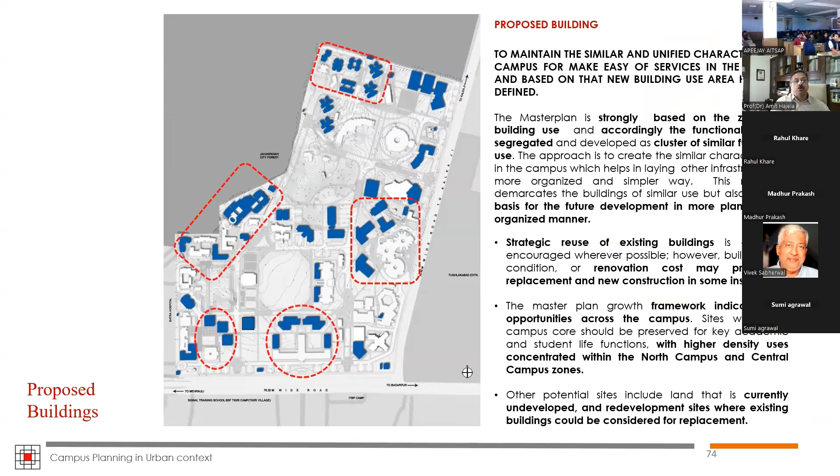Now, I'm moving to the last segment of my presentation, which is the Microsoft campus, which is being designed by RSP from Singapore and also partly by the office in India. And this is again being designed in different phases. And the very interesting part is that they have tried to create a public realm at grade here in terms of integration. So I think this is the third segment of your problem that you have. And so Microsoft Hyderabad campus fosters equity and flexibility through innovative design. And it has a very clear expansion program and the way it has been articulated.

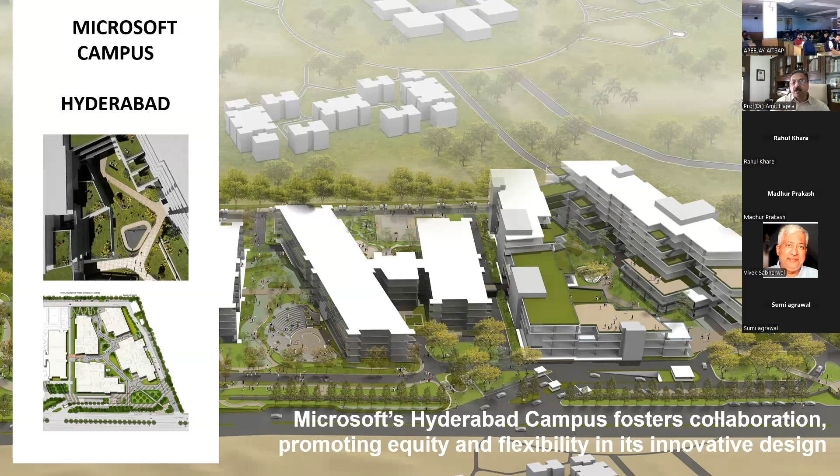So if you see the dispersal at the lowermost picture, you see those building forms being dispersed, and it is being connected through a leveled integrated system, which integrates buildings at different levels. So there's a public realm at the higher level, and there's also public realm at the lower level. Now you see there's the differential articulation of the forms, which looks at the different ramps that have been provided, outdoor terrace spaces, pedestrian connectivities, the business to business connection, B2B, B1 to B4 connections, as they call them. Then there are pedestrian ramps which have been articulated so that universal accessibility is provided,

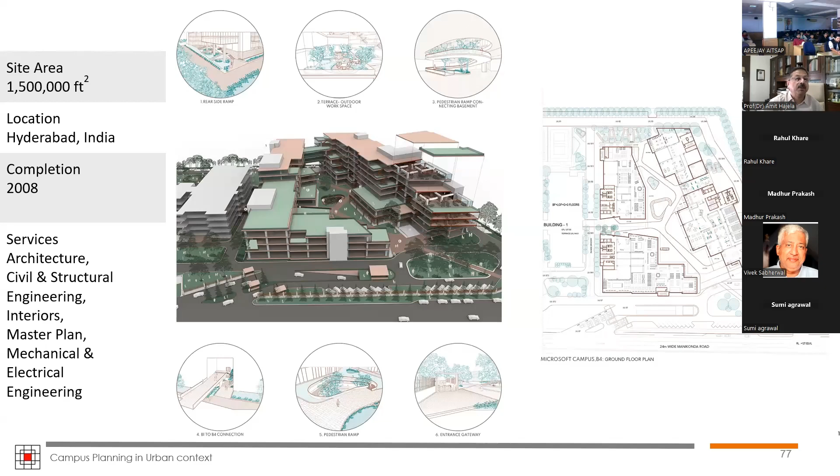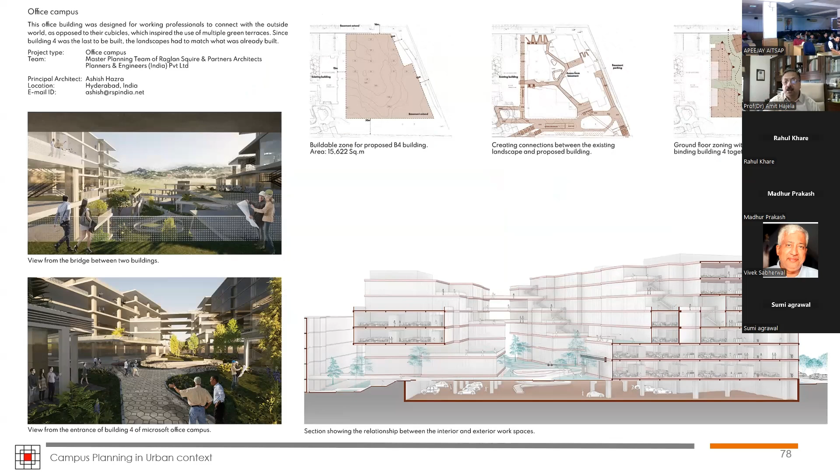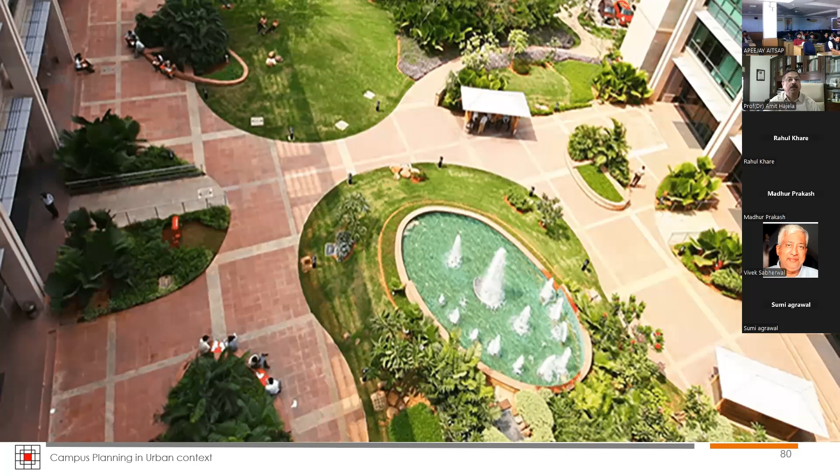and a very strong emphasis on the landing forecourt or the entrance forecourt has been articulated, and it has about 15 lakh square feet of built-up spaces, which have been integrated in the large part of the campus. And you could see this through the management of topography, the levels that have been created, the way parking management has been done in the entire area, and the way the building sets itself into the larger urban context. Now, these are some images of the places where congregational spaces have been articulated, landform has been used to the advantage, creating open amphitheaters, the large landscape greens, which are an integral part of the development, and also the outdoor external spaces, which are the social spaces within the campus.

Some of the larger imageries of the building, and see how it sets itself into the rocky terrain of the city of Hyderabad. The building depth has been so articulated that it maximizes the use of daylighting with asymmetry as a very integral part of the expression, but yet tries to bring the whole building together. So the atrium has been designed, and it also allows for some kind of seamless integration, but it becomes a landmark in the entire urban landscape of Hyderabad.

So you could see how the sustainable components have been added, louvers have been added to shade the glass, the parasol roof has been provided, and multiple such elements have been used with very careful and subtle use of materials to bring about coherence in the various building types. So primarily, these are some of those same images and the connectors that you see between blocks.